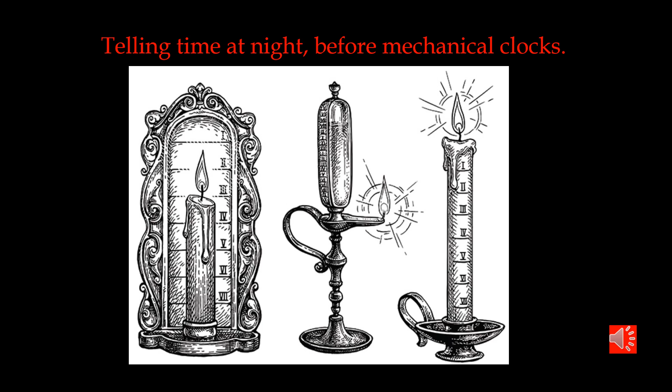The life of monks in monasteries in Europe were regulated very precisely, and it was the responsibility of one monk, the warden, who had to ring the bell in the monastery to awake all of the monks or bring them all to prayers every 3 hours.

Somewhere in an Italian monastery, there was one monk who decided that the candle and the oil lamp was not good enough. And being mechanically inclined, he started to work on a device, a mechanical device, that would wake him up and prevent him from oversleeping.

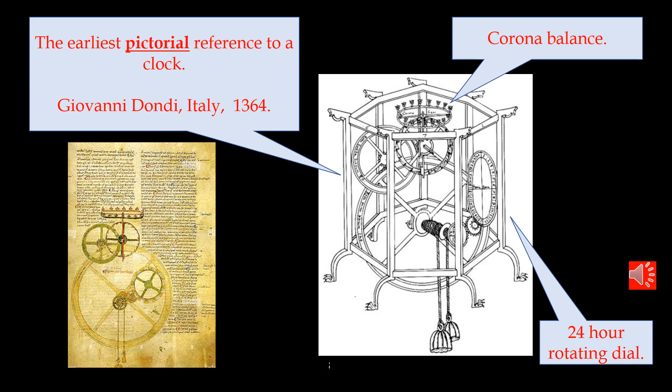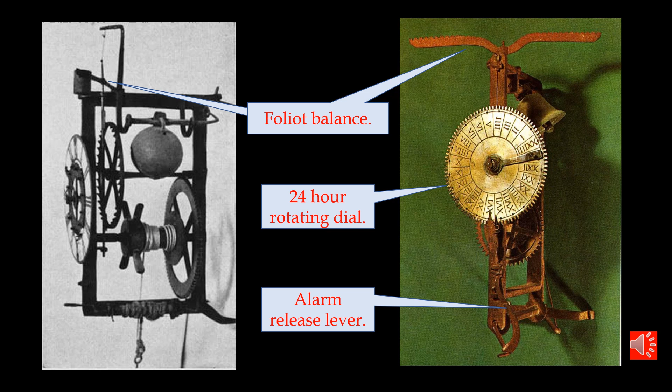Here are a couple of examples of similar monastery alarum clocks. Basically, an alarm clock that can be set to wake the warden of the monastery so that he can then go and ring the main bell in the tower. These small clocks would have been mounted on the wall or on a shelf in the warden's cell.

In 1953, the Science Museum in London announced an informal exhibition of clocks of the 15th and 16th centuries, inviting people to bring along any example of a clock of this period or before. In the advertisement, they showed the picture of a clock with the corona balance and a toothed dial wheel. At the bottom, they said that this monastic clock was to be included in the exhibition by courtesy of the Science Museum.

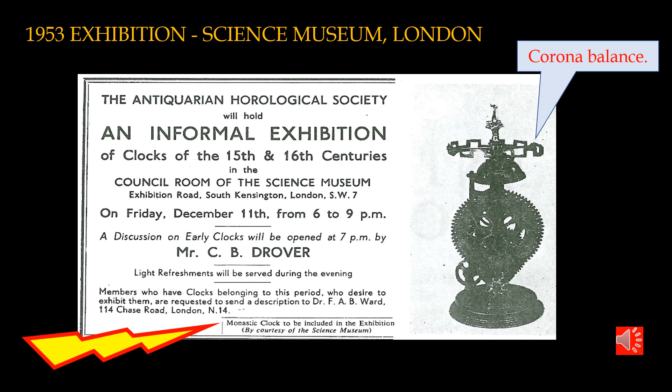In other words, it was a clock that the museum already had within their collection. This advertisement inspired me to do some further searching. I was most interested in having a look at this very early clock. In the research, I was able to find quite a few pictures and references, text about this particular clock, and some very good black and white photos.

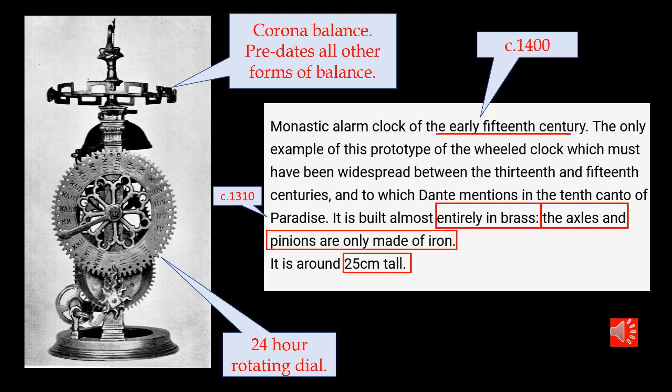Here we can see much greater detail, the layout and the construction of this early corona balance clock. You'll note that it says this clock is early 15th century and is the only example of this prototype wheel clock, which must have been made and widespread throughout Europe in the 13th to the 15th centuries. I was getting more and more interested in this particular clock.

Then I found colour photos, which were much more informative because they showed me which components are made of brass and which are made of iron. And here again it says this clock has been traced back to the end of the 14th century in Italy and is the oldest example of a small mechanical clock. But that was as of 1953.

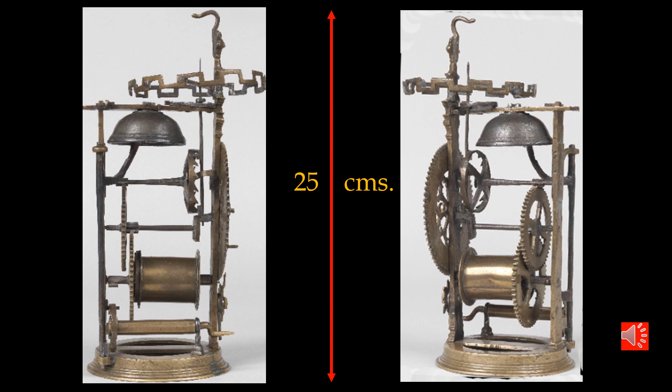Text accompanying the pictures stated that the clock was 10 inches tall, 25 centimeters, and that brings the whole clock into perspective, particularly when you consider that this clock would have been installed in the cell of a single monk.

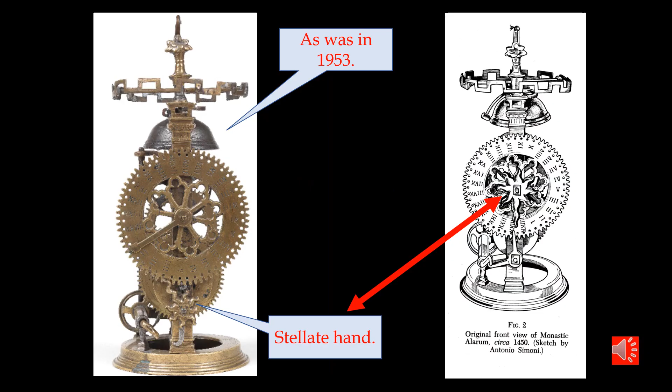An Italian gentleman by the name of Antonio Simoni, a recognized expert on early Italian timepieces, showed that this clock had been modified over time, as most of these old clocks were, and the original stellate hand had been moved from the center of the dial down onto the alarm work. His drawing on the right hand side of this page shows what he considered was the original layout and design of the clock.

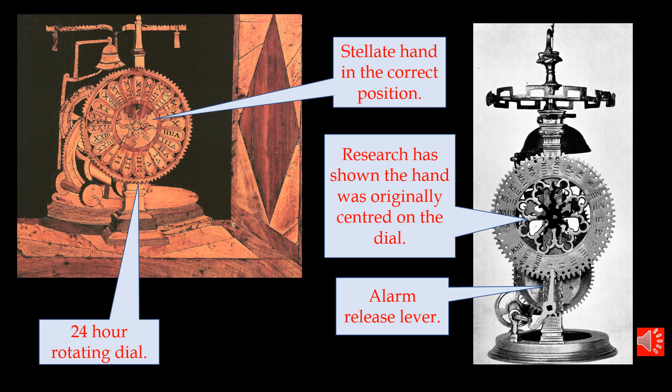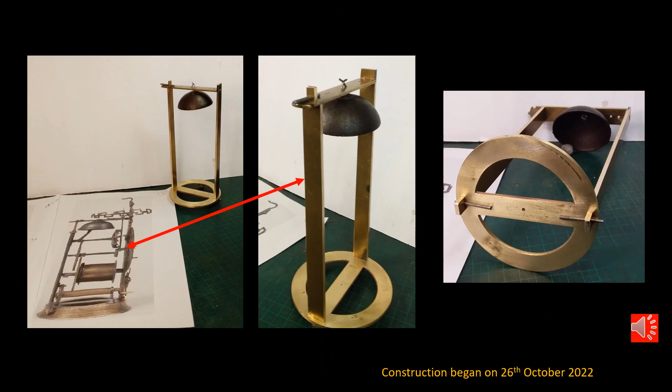This is a beautifully preserved example of the first mechanical clockwork. It's unique and historically significant, and I consider it a must for any lantern clock collection. Italian lantern clocks offer the complete range of innovation in early clockwork, and this is my collection of Italian lantern clocks. I believe it's reasonable that I should have that first mechanical Italian alarum in this collection. However, it's most unlikely that I would ever be able to obtain the clock that's in the Science Museum in London.

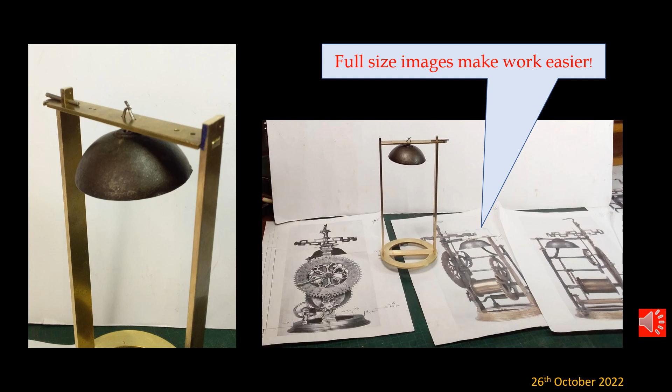The only alternative I have is to actually construct an exact replica. So here I go. The clock, being 10 inches or 25 centimeters tall, fits beautifully onto an A4 page, and the pictures I was able to obtain I could print to full size.

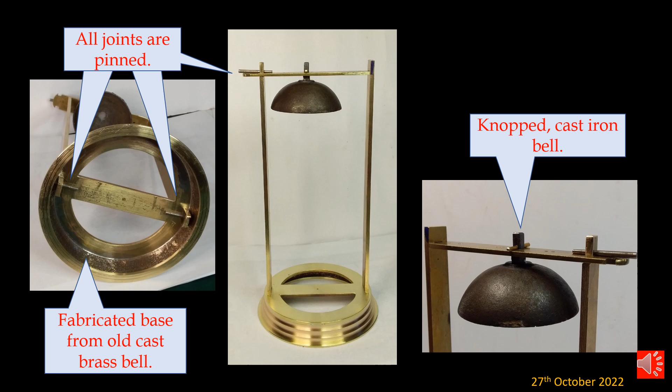I used that to begin construction of the base and frame for the replica clock. I determined I would use all the same techniques: pinned joints, and exactly the same metal where it was used on the original. I would use brass where brass was used, iron where iron was used. I would go as close as I could to making it exactly the same.

The bell I used was cast iron, not brass, not bell metal, but a genuine small cast iron bell. You'll note the shape is just a simple dome, because bell shapes had not yet been developed any further than a basic dome. Amongst the information I was able to find about this alarum clock was the wheel count.

This was of vital importance to me, because from the dimensions drawing I would be able to create the sizes. From the wheel count I could now create the wheel train in exactly the same way as it was made originally.

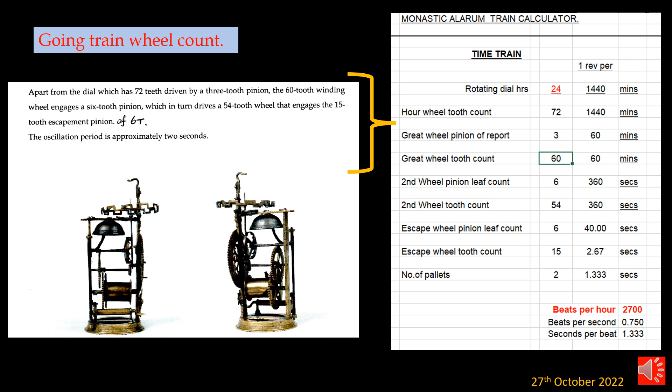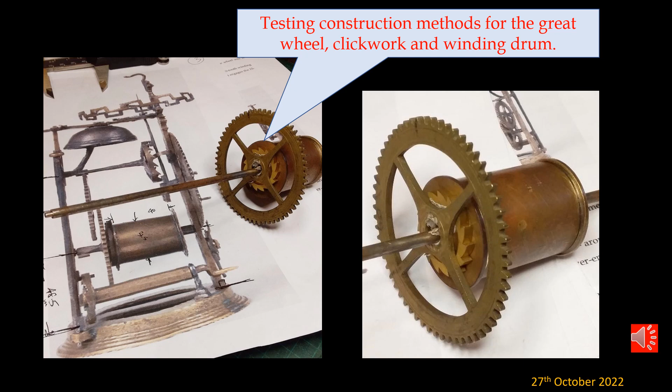Using my full-size pictures, I was able to dimension off those based on the 25 centimeter tall frame. So the first thing I started to do was create the great wheel and the winding drum at the bottom of the time train.

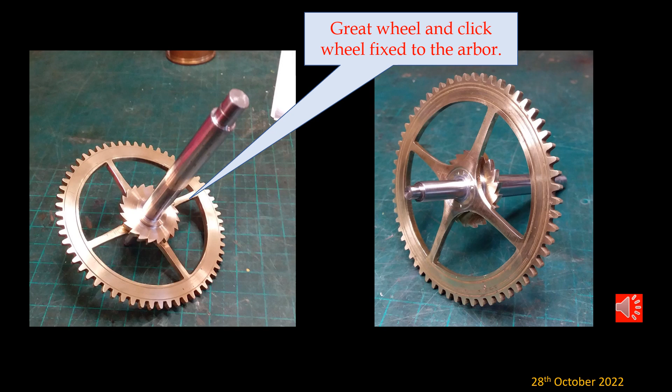Here I've created the first arbor, which carries the great wheel and the winding drum. It's dimensioned and ready machined to take the components that will mount onto this arbor. The great wheel and the click wheel are permanently fixed onto the arbor.

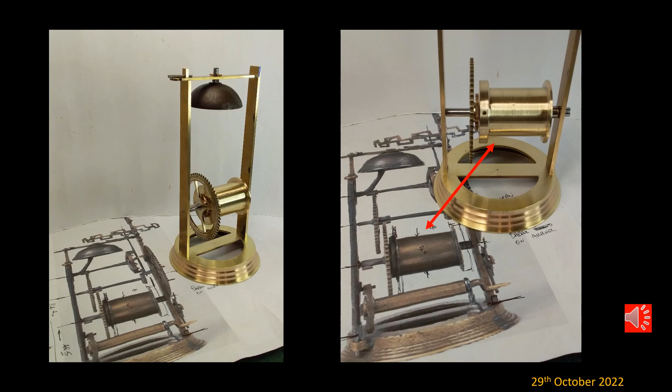With full-size pictures of this mechanism, front, back and both sides, it was a very simple process to transfer dimensions from the pictures to the metal. Here I've created the winding drum and the first arbor components.

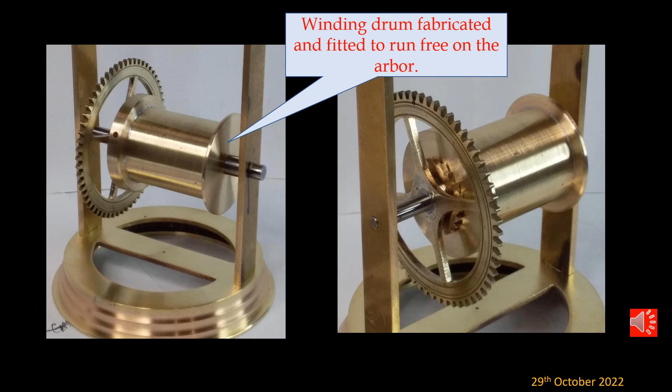As each component was completed, it was given its final finish, and for all the pieces of this clock I was aiming for a satin grained finish, not polished, but a satin finish on every part.

To couple the drive from the cable drum to the great wheel via the click work, a click was required. Here the blued iron click has been fitted to the end of the barrel so that it will lock and drive the great wheel.

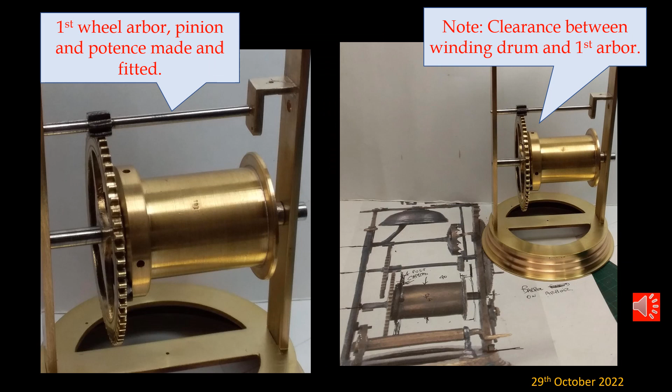The next arbor up from the great wheel is the first wheel arbor, and here it is in place between the back plate and a potence - a small extension from the front plate to carry that end of the arbor. The significance of that little potence will become visible in the future.

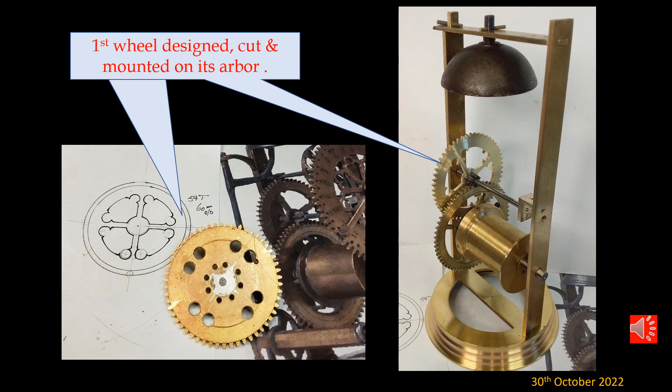If you look closely at the wheels in the original clock, you'll note that the crossings out, or the fretting out of the center of the wheel, is not just straight spokes. They are beautifully worked in representation of Gothic style, and so my first wheel had to be a match in size, tooth count, style and design.

Here is my drafting for the first wheel. The wheel has been cut and the holes drilled ready for me to put my jeweler's saw blade through, then fret out the center of the wheel in accordance with my design. Then the wheel was mounted onto its arbor and is shown in position in mesh with the great wheel.

Upward again to the second wheel, which in this case is the escape wheel arbor and pinion. Here the arbor is beautifully tapered to match the original and is positioned between the back plate, and again this wheel has a potence extension off the front plate. Note though that this potence is made of much lighter material so that it can be adjusted.

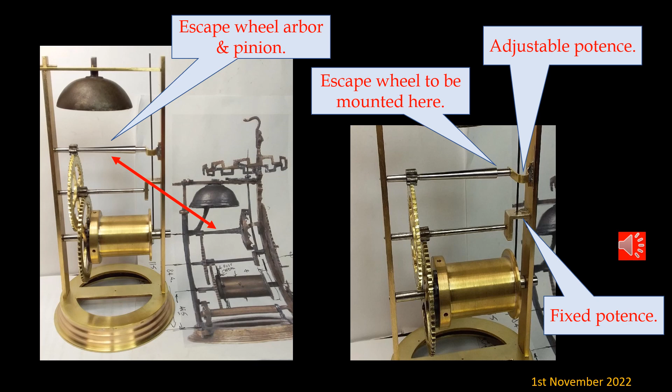The original wheel count dictated that the escape wheel here, a contrate wheel, had 15 teeth. These were cut and then hand formed to the final shape, and then the center of the wheel was again crossed out in the Gothic style.

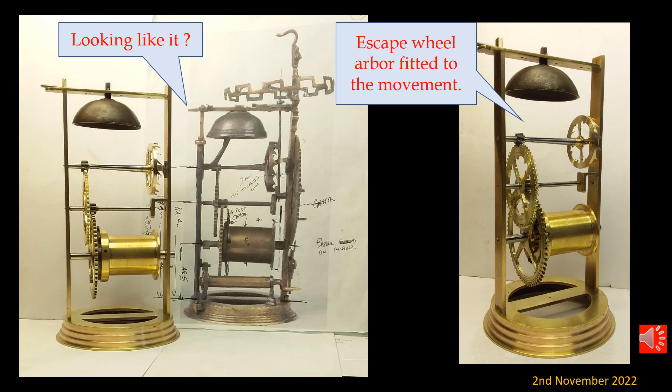Progress so far, shown here in contrast with the picture of the original clock, and I think it's starting to look very close.

The significance of the adjustable potence now comes into play, as the escape wheel can be adjusted up, down, in and out to give me the correct depthing and operation of the teeth onto the pallets.

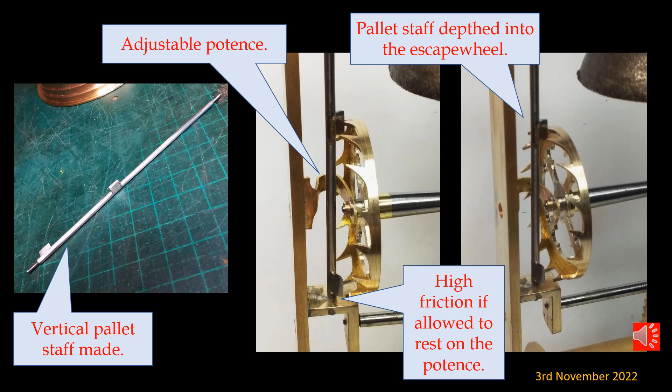With creations like this, one gets to a point excitedly where you can apply finger pressure and watch things happen. Exactly here, I was able to blue tack a piece of rod across the top of my vertical pallet staff, apply finger pressure to the great wheel at the bottom of the movement, and watch that top bar oscillate. That is a really great moment in the creation of anything like this.

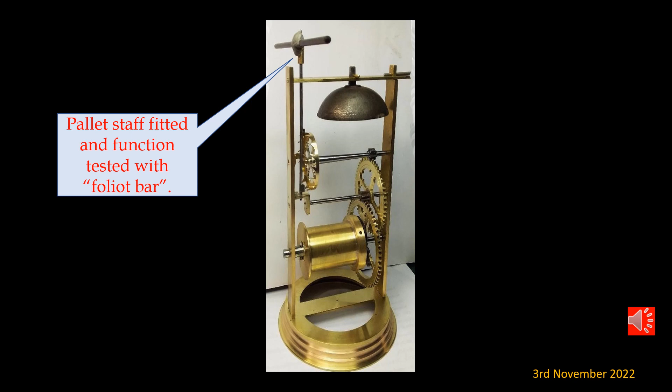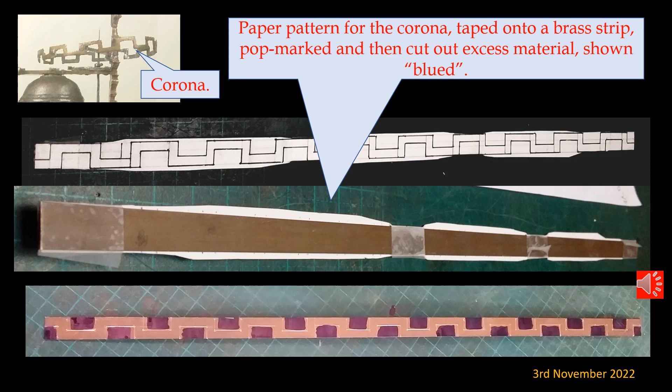This was one of the components of this clock that I was really looking forward to making, the corona. Based on the design from the pictures, I created a paper template, then fitted that paper template to a brass strip of the correct length and breadth, pop marked every change in direction of my paper template onto the brass, and blued the sections that I wanted to cut out. I did not want to cut out the wrong piece at this point of the project.

Surprisingly, the task was so simple. One would think this would take hours to fret out, but by sitting the brass strip into the jaws of the vise, it took 20 seconds to do two vertical cuts and then the horizontal cut for each segment to be removed.

And here was a trick. To roll this up into a true circle, I simply laid the brass strip on a layer of felt and rolled it with a steel rod. It started to curve up. By increasing the layers of felt, it continued to roll up until ultimately it became a complete ring.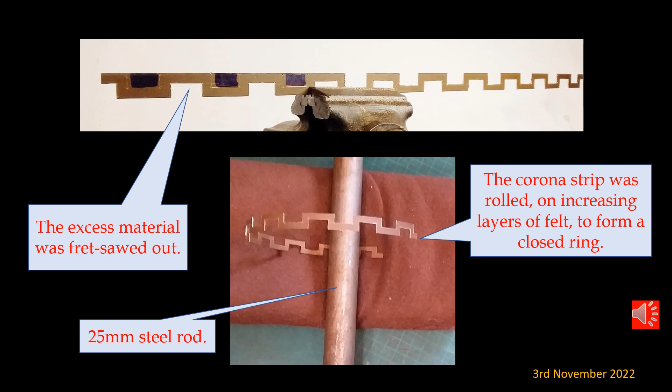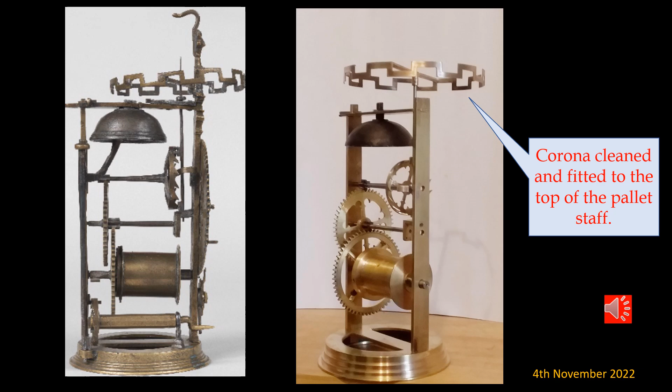Positioned on the ceramic block and held into shape with ceramic pins, the joint was completed with silver solder. So here is my cleaned corona sitting on top of the pallet staff.

To complete the balance, a cross arm was inserted. It was curved at the center to give clearance to the suspension post when it was oscillating. The entire corona was poised, and the sliding weights are fitted to the cross arm to give rate adjustment by moving them in and out towards and away from the center of the balance.

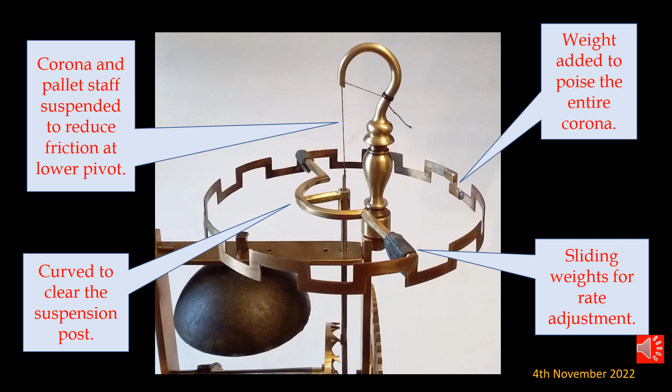Here are some interesting facts about the early control of these alarms. There was no restoring force applied to the balance. For instance, there was no gravity to bring the pendulum back to center, and there was no balance spring to bring the balance back to center. These balances operated without any restoring force at all, and that leads to the situation outlined here.

In later clocks, the wheel train layout centered around the main arbor of the clock, which led out through the front plate to the dial and carried the minute hand. There the power fed to the center arbor. The regulator, i.e. the pendulum or the balance, controlled the rate at which that power was dispensed, and that was displayed at the dial. So the regulator was truly performing its function as controlling the display and the power.

But in these early clocks, the power is at the center of the system, and it controls the display and the regulator. The more weight you add to the clock, the faster it will go. Take weight off, it will slow down, totally at odds to control of timekeeping.

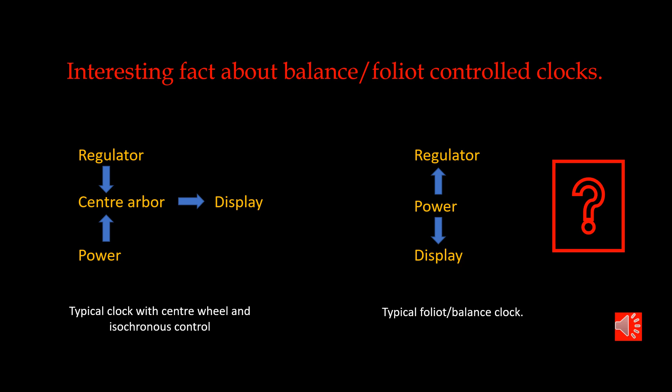Moving on to another of the decorative and functional components of this beautiful clock, the dial wheel, crossed out in true Gothic style with Roman numerals punched into the original cast plate.

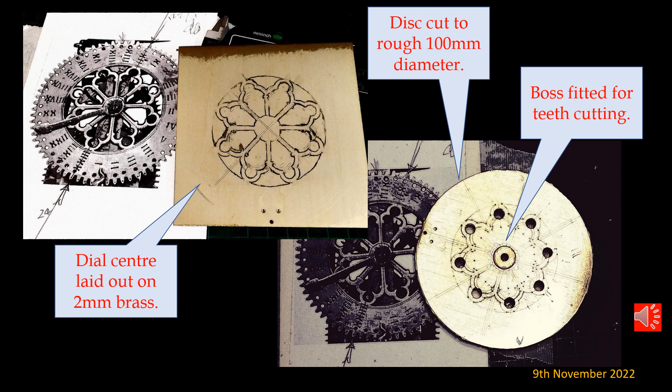To replicate this, I laid out the design first on brass plate, cut a rough 100mm disc, fitted a boss to the center, and then proceeded for tooth cutting.

The 100mm diameter disc just fitted into my milling machine, and I cut the 72 slots around the 100mm disc in preparation for hand filing of every tooth, as was performed on the original wheel.

At the same time, I marked out the indexing holes for the alarm, and there is one hole for every half hour on the 24-hour dial.

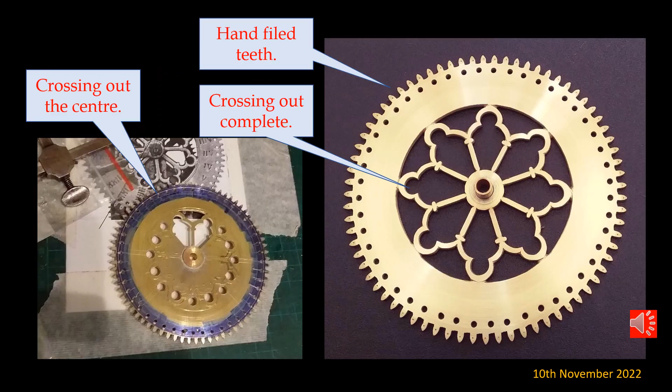A somewhat tedious job, but the results are so gratifying when you consider that all this was done by hand, and even the pop marks on each tooth are there still to indicate where a tooth had to be created.

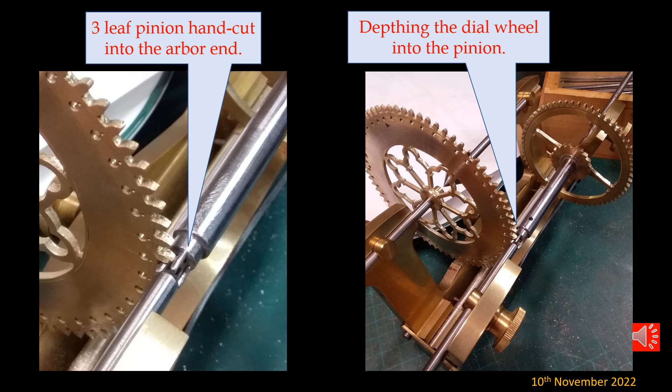The drive for this 72 tooth dial wheel comes from the end of the great wheel arbor. The pinion is 3 teeth, and it's hand filed into the round rod at the end of the arbor. So the end of the great wheel arbor will extend through the front plate and drive the dial wheel.

And here, having created the wheel teeth and the 3-tooth pinion, I'm depthing them so that I know the centers for both of these wheels, and I'll be able to transfer that to the frame and mount the dial wheel correctly in correct mesh with the pinion.

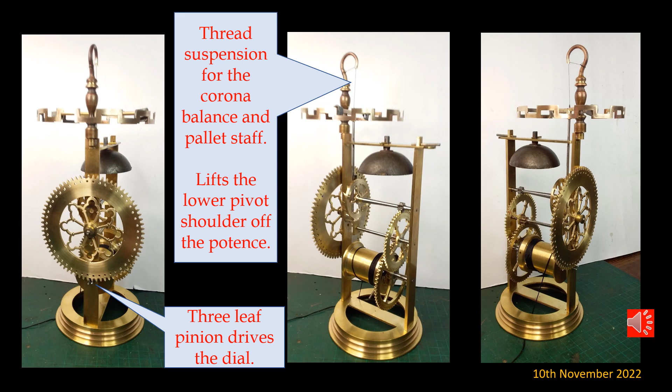At this point, mechanically, the timepiece is complete.

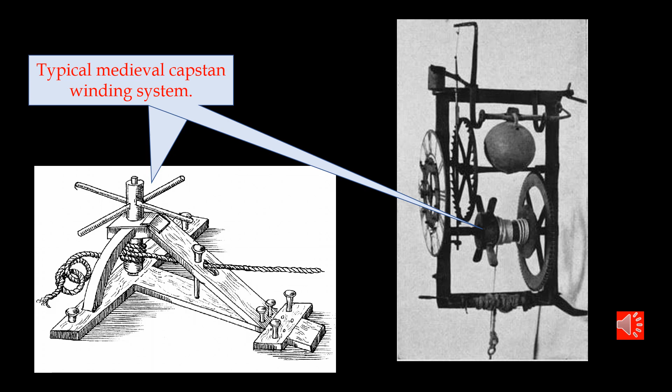The capstan is one of the oldest devices used to provide mechanical advantage and move loads, and it was utilized in these early clocks to raise the weight. Here I have fitted the capstan winding bars to the winding drum. They will be, or can be, used to wind the cable up.

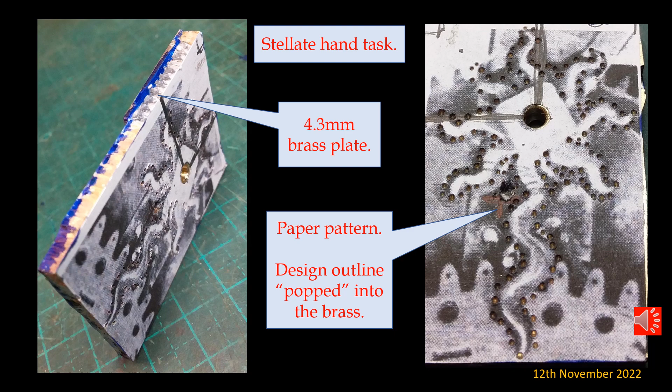The stationary stellate hand was copied from the original, a paper template transferred to brass plate. The design was popped into the brass, ready for fretting. The hand was then fretted out using a jeweler's saw, and here you can see tracing around the design to produce the cutout hand.

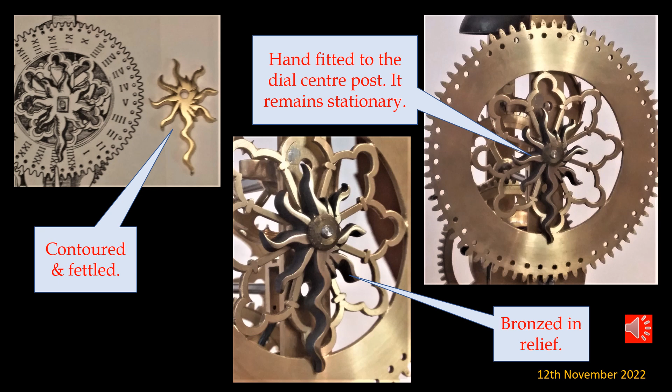To complete the hand, it was contoured and fettled to give it a three-dimensional appearance. It was bronzed in relief and then fitted to the dial post, and it remains in a stationary position whilst the dial rotates behind it.

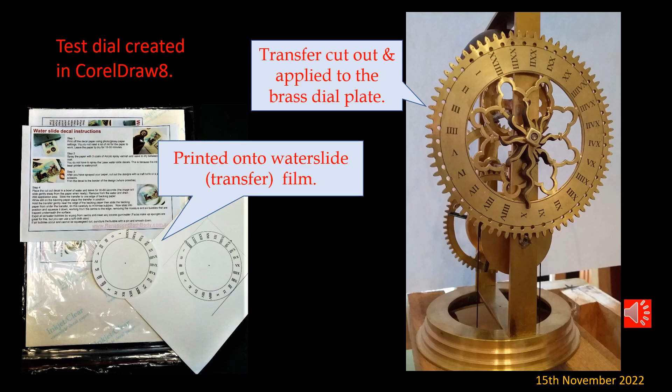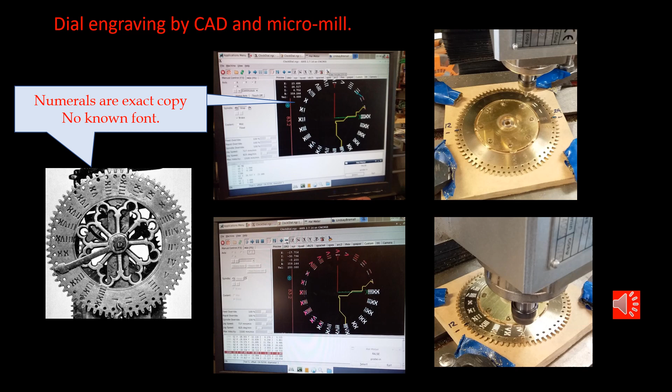The Roman numeral font on the original dial could not be found in any font database. It did not exist. It was a true original medieval font. The only way to reproduce this was to actually create the font in the computer using CAD and then milling from that software to create an exact replica of that font size, shape and style.

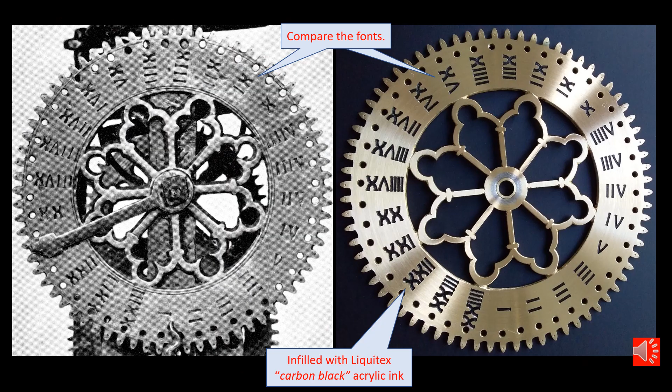Here you can see the final milled Roman numerals. They are really beautifully done, but they do lack the individuality of a hand done, probably hand stamped numerals. Nevertheless, it's a font that doesn't exist anywhere else, and the numerals were infilled with Liquitex carbon black acrylic ink, a really good substitute for black wax.

Having completed the time train, I now move on to the alarm train, and the first component to be made is the winding arbor. In accordance with the original, it is a hexagonal brass bar with the wheel at one end and a winding crank at the other, pivoting in an iron front mounted bush.

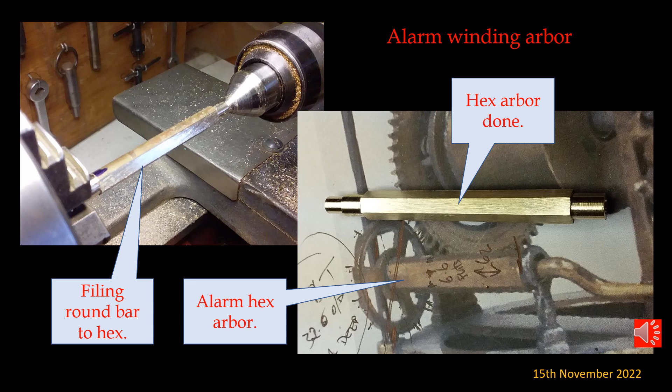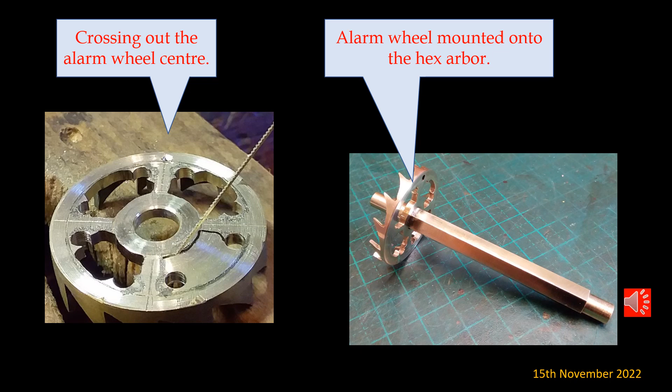The alarm escape wheel or rattler wheel was crossed out, again in the Gothic style, and mounted onto the hex arbor. Here the little front iron mounting is made and mounted onto the base of the clock, and the arbor will run in that as the front pivot.

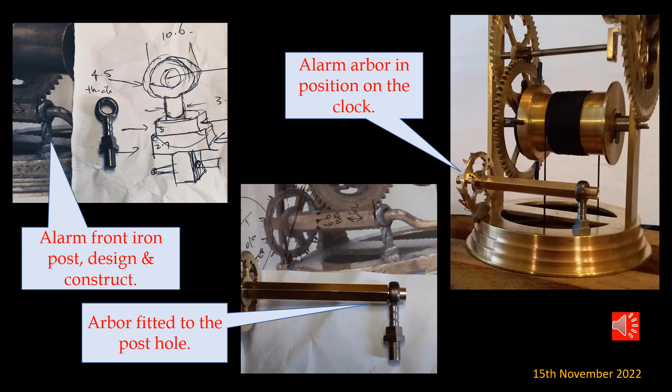The little winding crank was made from brass rod and then fitted into the end of the hex arbor.

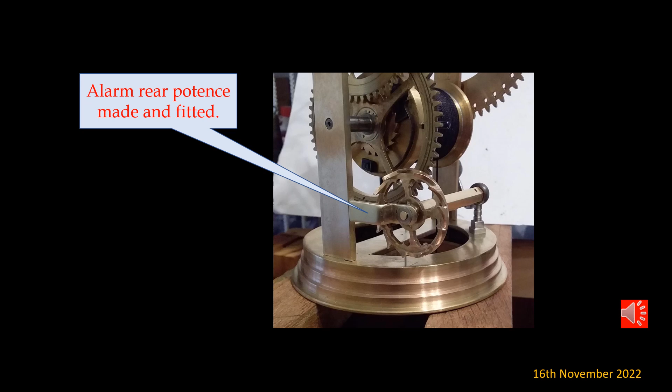Once again, the arbor is carried by a potence mounted off the back frame, and the little potence has got an iron bush in accordance with the original, so that we do have dissimilar metals: brass arbor running in an iron bush front and back.

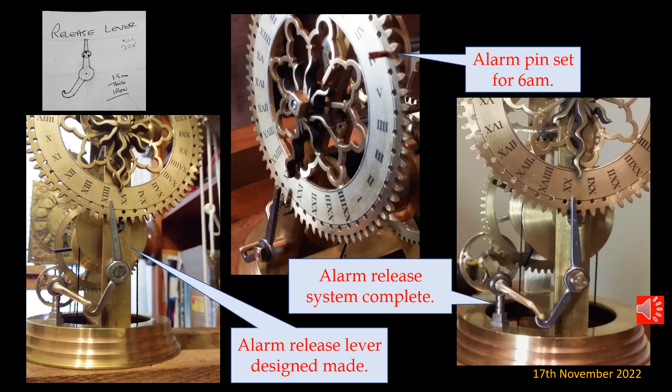The alarm lever, made from iron, mounts below the dial with one end tripped by a pin mounted in the dial wheel and the other with a hook to hold the crank in position.

Being weight driven, when the alarm release pin comes around and trips the lever, the crank is released and the weight runs the alarm.

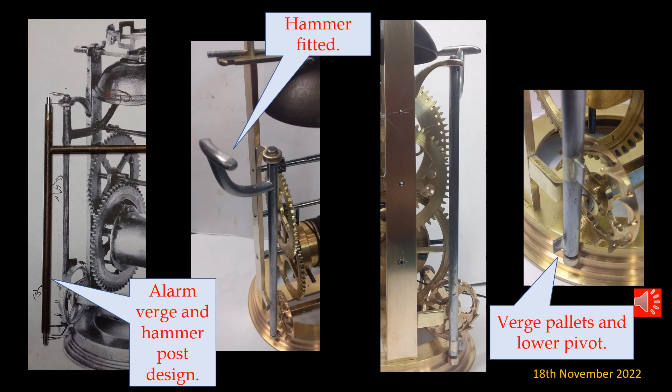As was the case for the time train, the alarm train has a vertical verge and hammer post. The post crosses the centre of the alarm wheel with two flags operating on opposite sides to give a rattler effect. That rattler oscillates the hammerhead inside the bell and rings the alarm.

Here you can see the completed alarm system, from the winding arbor, past the rattler wheel and the verge pallets, up the post, then from that into the bell, and then the crosshead on top of the post to hit the bell on both ends of the hammer.

With both time and alarm trains complete, all that remains now was to add some of the decoration that was apparent on the original clock.

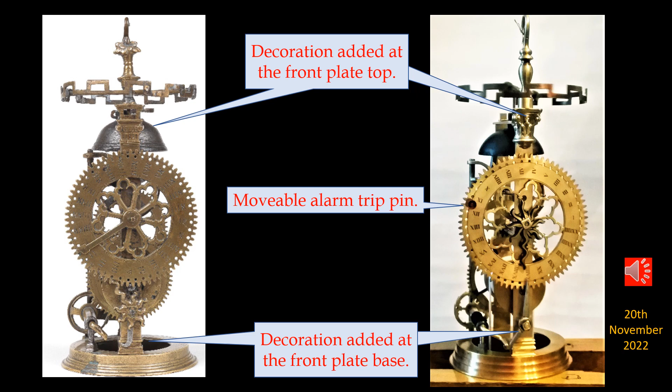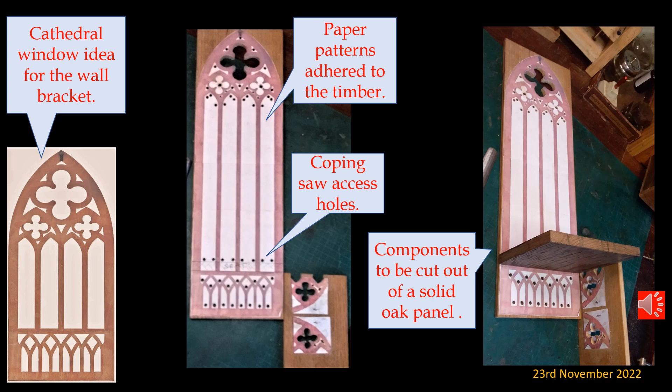The backboard of the bracket was to be made up out of two components: a light oak backboard and a dark oak masked front board.

The design was cut out of the front board using a coping saw, stained, and then adhered to the light oak backboard to give depth and contrast to the design.

The other little components were made in solid oak and stained dark, ready for full assembly. Here is the completed bracket.

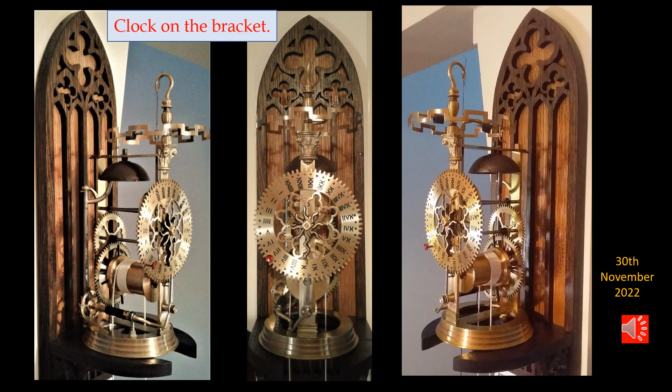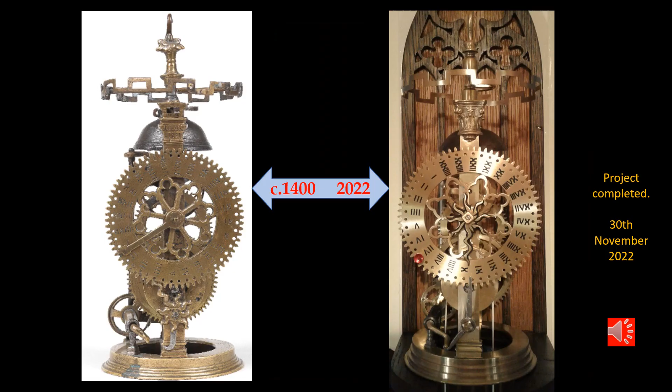So finally, the clock has its mounting. It sits beautifully in contrast with the Gothic bracket. 620 years between them.

I've done my very best in recreating the original clock using the same techniques, the same materials, the same size, in order to be able to understand a little more about how such a clock could have been made that long time ago.